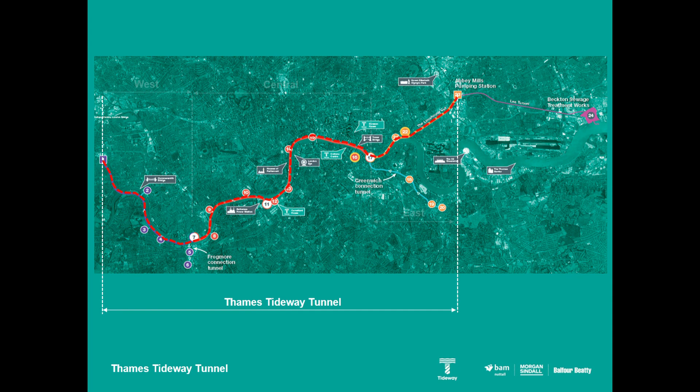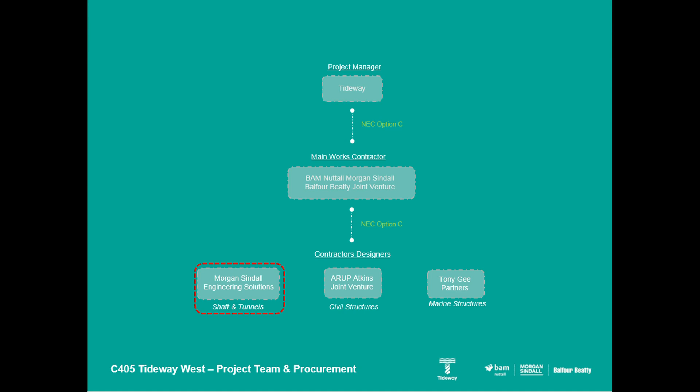Given the scale of the scheme, the tunnel was split up into 3 key contracts, namely West, Central and East. The Western contract, contract C405, was awarded to the BAM Nuttall, Morgan Sindall and Balfour Beatty joint venture in September 2015. It was procured using an NEC Option C single-phase design and construct contract. The joint venture has 3 key designers undertaking their design, now shown on the slide. A point of note is that Morgan Sindall Engineering Solutions are responsible for the shaft and tunnel temporary and permanent work design.

The scope of C405 West comprises 7 key shafts, most of which have been designed and constructed using SCL linings. 5 of those 7 structures are now complete, and over 15,000 cubes of SCL have been applied in that process.

Our main drive is a 6.9 kilometre long single bore of 7.1 metres internal diameter. Our drive starts in Carnwath Road and goes west towards Acton storm tanks. Our main tunnel TBM, Rachel, is about 450 rings in. She's got a long way to go, but she's making good progress. She's constructing our tunnel with a look-up of 1.4 millimetres per metre. So far, she has churned up and spat out over 70,000 tonnes of London clay from beneath the river.

The scope of West also involves 4 smaller connection tunnels, and these have been constructed using a range of methods, including mechanised tunnelling, pipe jack and SCL. The focus of our presentation will be on the Hammersmith Pumping Station, and you can see that on the slide now.

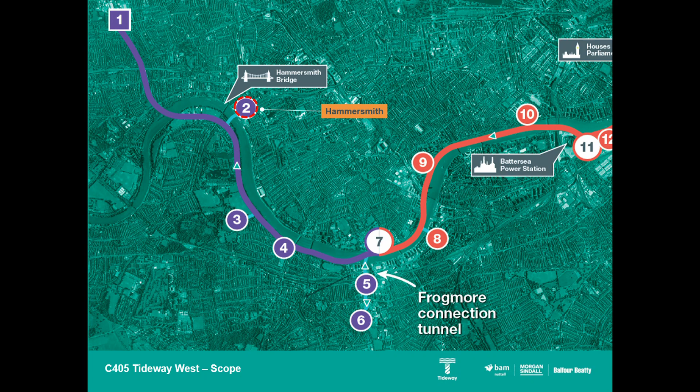They're working in close proximity to raw sewage mixed with discarded wet wipes and sanitary products. The works must be undertaken while keeping the pumping station live, as if it goes offline, this may result in the catastrophic flooding of West London.

The inlet channel is just one key element of this asset of national importance. It channels storm relief flows into the pumping station, where 8 stormwater pumps pick them up and pump them out into the Thames.

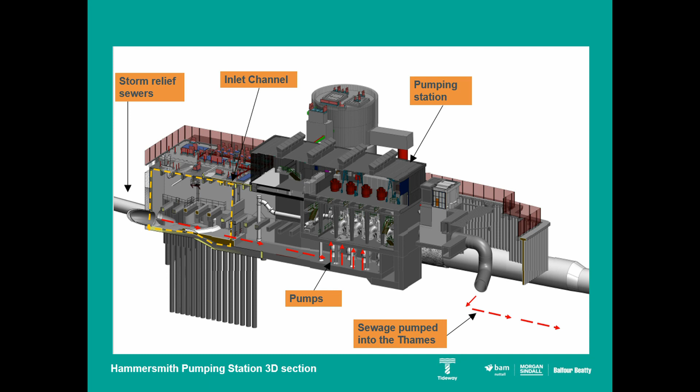The works in the channel are planned in such a way that the men and their tools can be removed quickly in the event of a storm. The channel is 18 metres deep, 5 metres wide, and 25 metres long.

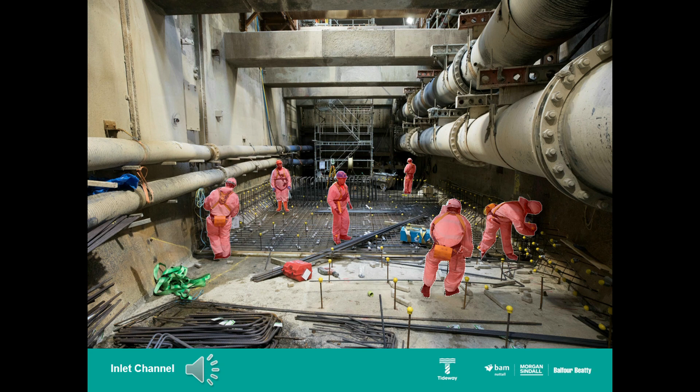When storm relief flows make their way to Hammersmith, they enter the inlet channel at a flow rate of up to 30 cubic metres per second.

To put that into context, this great theatre is 18 metres deep, 12 metres wide, and 8 metres high. It therefore has a volume of 1,700 cubic metres. I'd like you to imagine that the storm flows are entering this room and not the Hammersmith Pumping Station.

On entry to the room, it would take just 9 seconds for you all to be swimming in sewage. 55 seconds later, the room would be full and we'd be in serious trouble.

The Hammersmith site was signed over to the BMB joint venture in the summer of 2016, and works have been going on since. The site is surrounded by a number of key residential receptors and sensitive assets, such as Frank Banfield Park to the north, and the residents of Chancellor's Road and Fulham Reach to the southwest and east.

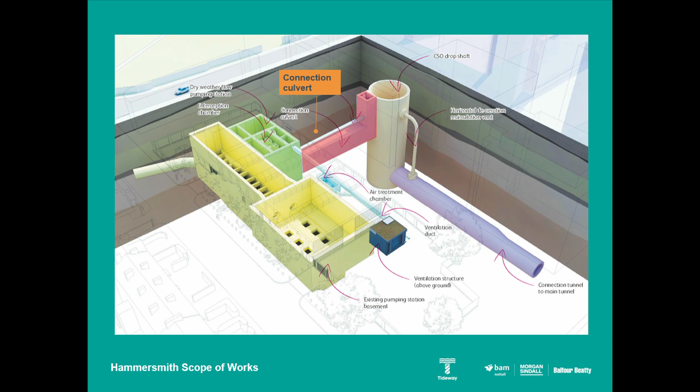The works at Hammersmith are very typical to other CSOs on the scheme. Their purpose is to transfer the flows from the pumping station into the main tunnel, and that is achieved through an interception chamber, a connection culvert, a drop shaft, and a connection tunnel.

The interception chamber is being constructed directly adjacent to the inlet channel, and the works here are progressing well. The team have now excavated over 4,000 tonnes of material and have just started the internal structures. Once complete, the interception chamber will house a series of penstock gates, which will control flows into the new Tideway scheme.

The connection tunnel is 300 metres long and juts out into the centre of the Thames where it meets the main tunnel. The tunnel passes under a number of key assets, including the river wall and 2 blocks of luxury flats with an average value of 1.4 million.

I'll now pass you over to Peter, who will take you through the design of the works.

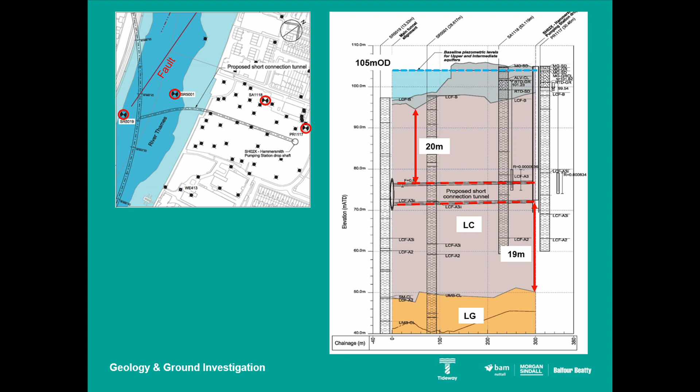Here is the overview of the client reference design. This shows the key requirements for the design development. We have a 35-metre deep shaft with 11 metres internal diameter, a 48-metre long deaeration chamber with a 5.1 metre internal diameter, and a 250-metre long connection tunnel with a 4 metre internal diameter.

Both the tunnel and the shaft required the use of a primary and a secondary lining, and the use of a waterproof membrane as well, so it could comply with the strict water ingress requirements. There is a BMB innovation to remove this waterproofing, which required consent from Thames Tideway as well.

There's a 3.5 metre internal diameter stainless steel tube in the middle of the shaft. The purpose of this is to transport the sewage down from the top of the shaft to the bottom in a harmless manner. Otherwise, if the sewage came down on itself, it would come crashing down to the floor and damage the structure.

The way this works is by creating a vortex within this tube. The sewage comes towards the top of the tube and spins down the shaft all the way down to the bottom in a harmless manner.

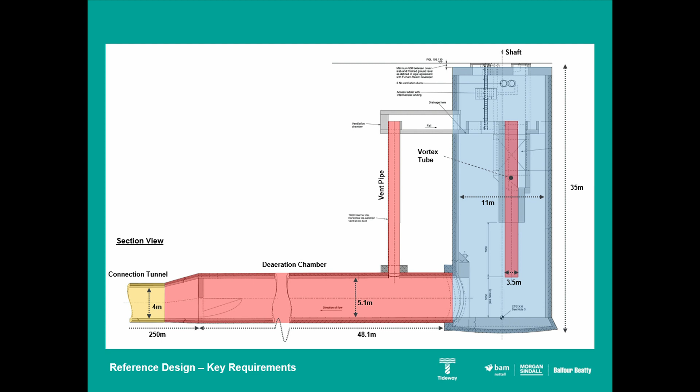We've undertaken a number of computational fluid dynamic models, and real-life scale tests were undertaken just to verify this assumption. This short video shows how the sewage will travel along the connection culvert and down the shaft as a vortex.

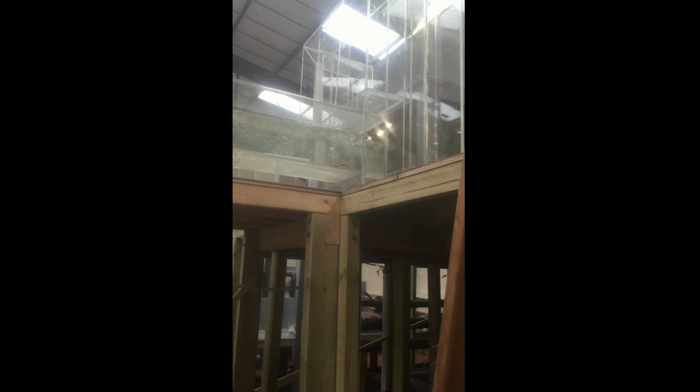The next video that I'm about to show will show another scaled-down model, about 1/10 of the size of the actual shaft. Just to note, as the water comes out of the bottom of the vortex, you'll see the amount of air that is generated in this. This is as we go along the connection culvert, down the vortex.

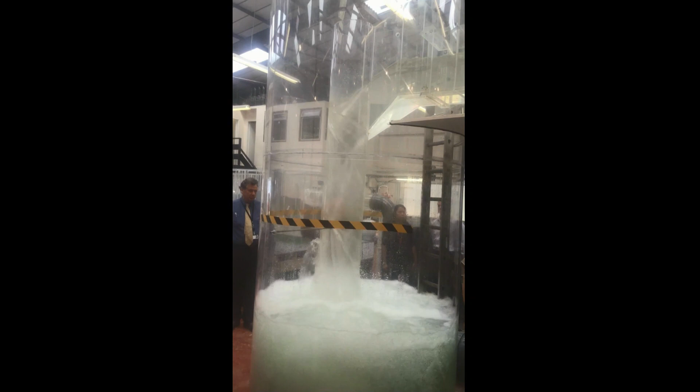So as you'll note from that video, there's a lot of air that's generated at the bottom after the vortex. It's really important that any of this trapped air is removed from the system so it doesn't cause damage in the future. So this is where the deaeration chamber and the vent pipe come into play.

As the sewage moves from the shaft into the deaeration chamber, there's a flow restrictor wall at the end of the chamber, which basically holds up the sewage just long enough to allow the air to rise to the surface and leave the sewage. It then travels along the top of the deaeration chamber, out the vent pipe, and back up to the surface in a harmless manner.

For the design, the works information sets several key requirements: a 120 year design life, to be able to accommodate the predicted sewage flows and the surge pressures that would be experienced by both the shaft and the tunnel.

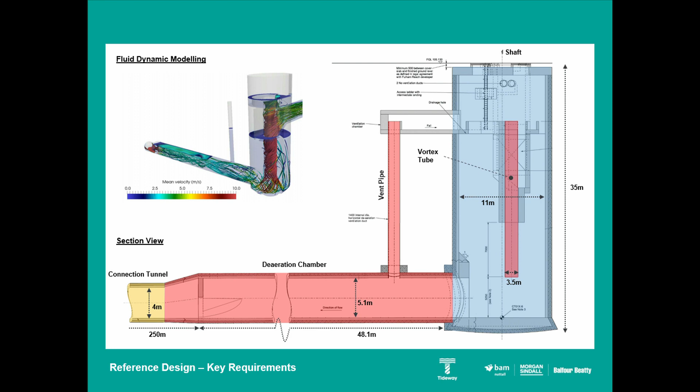To comply with the strict water ingress and sewage egress requirements, to minimise the requirement for repair, replacement and maintenance of the works, and finally, the design and construction must stay within the boundaries stipulated by the development consent order. In terms of Hammersmith, this is very tight, which Ed will touch upon later.

As already mentioned, the water ingress requirements are very strict. As you can see here, the maximum acceptable water ingress into the completed shafts and tunnels is 0.1 litres per metre squared per day on average, or 0.2 litres per metre squared per day over any 10-metre section.

Part 2 of this clause also states that it's limited to damp patches, which is defined as discoloration of part of the surface of the lining. This part can be open to interpretation and has caused issues as well - well, not issues, it's caused points of contention along the way.

Part E also states that limitations on seepage apply to both ingress and egress, so we have to ensure that the water doesn't come in and the sewage doesn't escape. This is verified by observation and measurement within the tunnel, and for outside of the tunnel, it's verified by calculation and monitoring the groundwater quality in the local area.

These strict requirements have been outlined by Tideway to ensure that the maintenance and operations costs of the system are minimised across the whole of the Thames Tideway scheme.

I will now give you an overview of the design development gated process, which is very similar to the RIBA stages. As a design and build contract, the contractor has been heavily involved throughout all of the stages, from gates 1 to 5, and they've helped develop the design through the use of several constructability meetings.

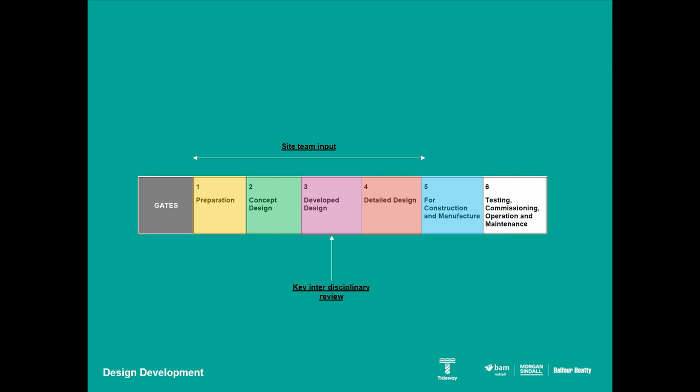The Hammersmith design started in September 2015, along with the start of the contract. The primary lining for just the shaft finished in December 2017, and for the tunnel, the primary lining and the secondary lining finished in April 2018, so not very long ago. The shaft secondary lining is close to being finished, and the internal structures, the vortex and the cover slab are still ongoing.

Here's an overview of the Gate 5 design. Each of the elements specified here are to comply with the durability requirements in terms of the mix design and the design crack widths. This is in order to make sure that it meets these tight water ingress requirements.

The shaft primary lining was created with steel fibre reinforced SCL with 1.2 metre advances as it progressed. The shaft primary lining and the SCL allowed flexibility, so therefore in order to minimise the thicknesses and also the amount of material consumed. And as we progress down to the bottom of the shaft, it also has an elliptical shape which incorporates the tunnel opening portal.

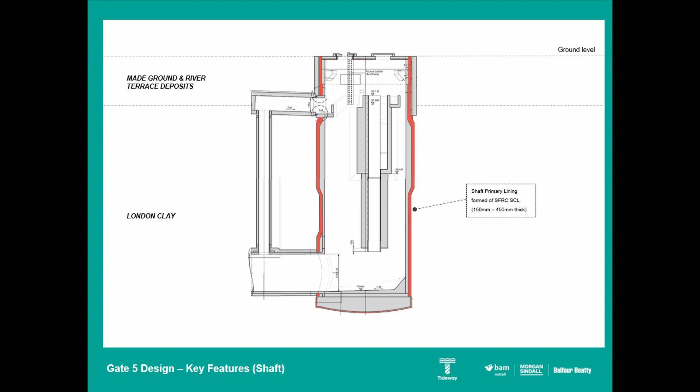There's a thickening section here which uses traditional bar reinforcement, which is also to be sprayed in. At the bottom of the shaft is the base slab. This is a 2.2 metre thick base slab, designed as a flat-topped structural dome, and this resists the long-term pressures of uplift from the geostatic and water pressures.

The shaft secondary lining has hybrid reinforcement, utilising high-performance steel fibres and traditional bar reinforcement. It's up to 800 millimetres thick in places. The traditional bar reinforcement helps to tie in the accommodating structures inside of the shaft, so this ties in any of the internal structures and the vortex tube itself.

The tunnel primary lining is also installed in a similar manner to the shaft. It's steel fibre reinforced and is installed in 1 metre sections and is 325 millimetres thick.

The tunnel's secondary lining is 250 millimetres thick, and the design follows the smart shell technique, which removes the requirement for traditional bar reinforcement and uses high-performance steel fibres, in this case Dramix 5D fibres, to replace that reinforcement. This technique was proven beforehand on the Lee Tunnel project by full-scale tests and has been verified since.

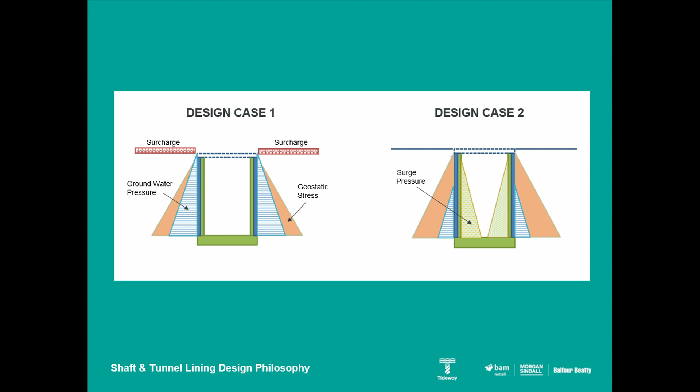To be able to understand how the primary and secondary linings work, we need to understand how they're installed. The primary lining is first installed sequentially, as mentioned, in 1.2 metre advances or 1 metre advances in the tunnel, and this takes all the initial groundwater loading and all the ground pressure as well. The secondary lining is then installed in a stress-free environment.

However, over time, additional external pressures are experienced by the shaft and the tunnel. This results from clay consolidation, changes in groundwater, seepage, and surge events. It causes the primary lining to deform, which then activates the secondary lining, resulting in the two linings working together in a combined manner.

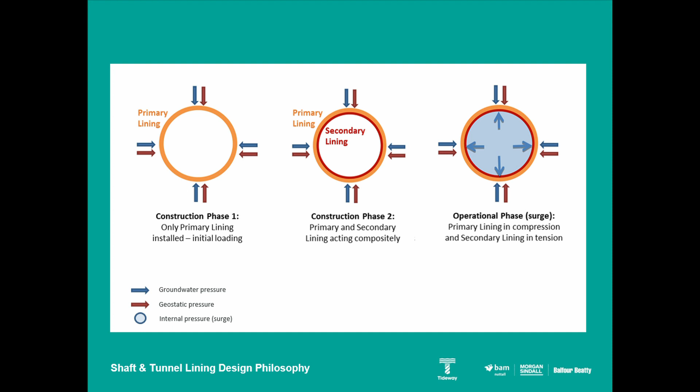When in operation, the primary lining will always remain in compression, and the secondary lining will go into tension during the surge event.

The primary lining, also steel fibre reinforced, will be the same mix as the initial layer, and its sole purpose is as a watertight measure. It uses steel fibres to control cracking in the temporary condition, during installation when bending is expected. It provides the only water tightness that we have, as there's no traditional membrane between the primary and secondary linings.

The secondary lining itself is cast up against the primary lining. As mentioned before, it's reinforced with Dramix 5D fibres, and some areas have rebar as well, to control the crack widths and limit them to less than 0.2 millimeters. This ensures the durability and promotes self-healing of the concrete.

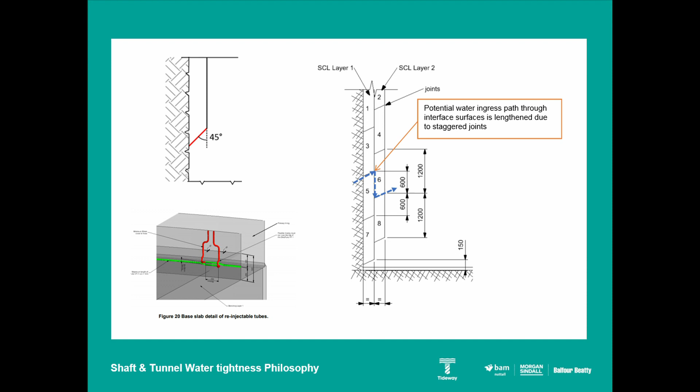Here you can see the key requirements that, as the designer at MSCS, we've outlined for the watertight SCL mix. The steel fibers require a minimum tensile strength of 1500 MPa. The mass spray concrete requires a low permeability coefficient of 1 times 10 to the minus 12.

To put that into context, normal spray concrete has a permeability coefficient of around 1 times 10 to the minus 10, and up to around 1 times 10 to the minus 12. So we need to make sure that we're better than this.

And not just across the mass spray concrete, but also at the joints within the spray concrete. The key addition here is the crystallization agent, and in this case, we've used Xypex with a recommended dose of 5 kilograms per meter cubed.

The way this crystallization agent works is that it's infused with the mix itself, so it actually becomes part of the mix, and it reacts with any moisture that travels through the concrete. By reacting with the moisture and the byproducts of cement hydration, it's able to form insoluble crystals within the capillaries of the concrete, which helps provide further assurance of a watertight concrete.

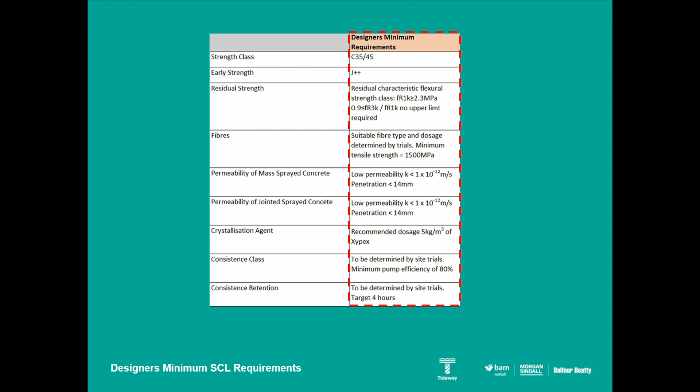Through working with CPI and BASF, it was identified that the Xypex was interfering with the superplasticizer, delaying the strength gain of the concrete. Once this was realized, the superplasticizer was changed, and the accelerator was changed from SA160 to SA194.

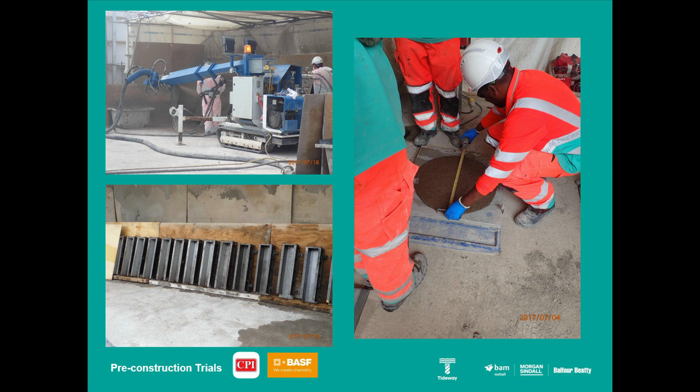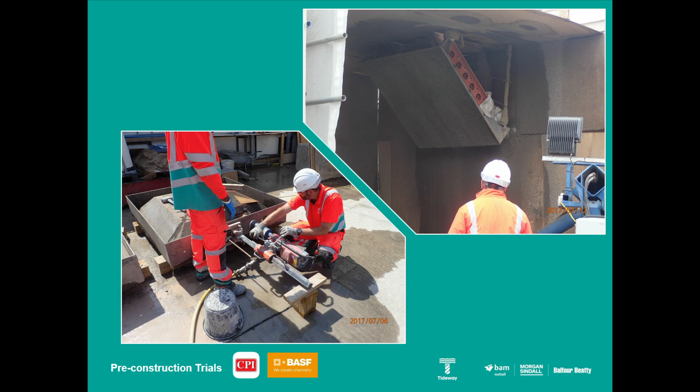The concrete proved easy to spray with low levels of rebound and good compaction. This was regardless of location, such as the invert or the shoulders, the mix proved to be very good. And as you can see from our cores and our flexural beams as well, we managed to obtain a very good mix.

There is a particular focus on the joints. So here on the left-hand side, we've set up a panel. The way we'd go about this is we'd spray the first-hand side, and we'd try and form the joint during the spraying process.

After spraying, we'd come along, clean and tidy up the joint with a high-pressure jet wash, similar to what we'd actually do in the works. We'd leave the sample for 24 hours, after which we'd return and spray the rest of the panel. Once the panel was complete and cured for 28 days, we'd come back and core directly through the middle of the joint, so we were able to test this joint for compressive strength and, more importantly, permeability.

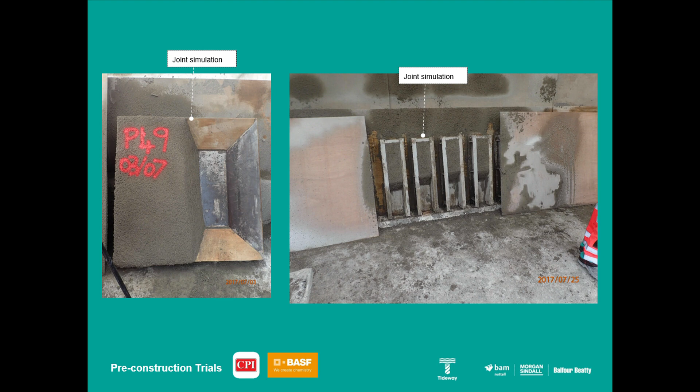Two water penetration tests were undertaken on the mix. The first one was a European standard test, which is specified in the works information. This tested the sample for 72 hours under 5 bar.

The second test was a Morgan Sindall developed test. It's a far more onerous test, as it's tested for 96 hours under 10 bar of water pressure. And it doesn't just measure the water penetration, but it also measures the amount of water left within the sample. From this, we're able to ascertain the water permeability coefficient.

As you can see on the screen, this is a general setup of testing equipment. And what we're trying to achieve on the right-hand side is just very low penetration.

After 6 weeks of trials, BMB developed their final mix. They selected Dramix 4D fibers to be able to meet the minimum tensile strength.

The permeability coefficient was a minimum of 7 times 10 to the minus 14 across both the mass spray concrete and the jointed samples, which is much lower than our requirement. And the addition of Xypex was still included as well.

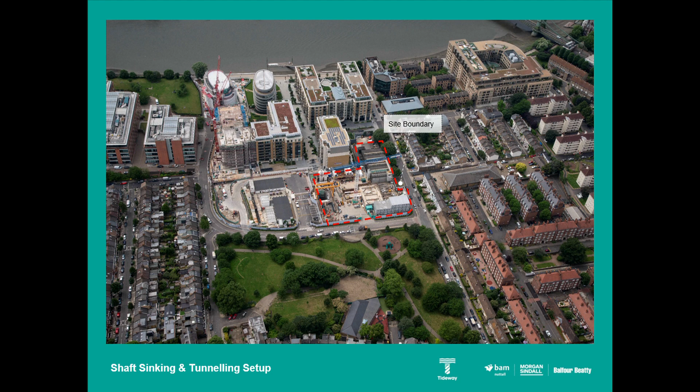Initial ideas pointed towards the use of an acoustic shed, which would be placed over the shaft, craneage and batching plant. But given the tight constraints of the DCO, this was not possible. As you can see from the image, the site boundary we were given was a mere 2 metres away from the extrados of the shaft. So this is the compromise site setup we came to.

I'll start with concrete batching. We initially considered the use of a traditional plant. Given the tight available working space, this was not possible. It was also not seen as wise to have aggregate bins that were loaded day to day because of the noise associated with that. Due to the issues with the mix and the flow retention reduction, ready mix would also not be feasible.

Additionally, the code of construction practice only allowed deliveries between 8 and 6, and we wanted to tunnel on a 24-hour basis. So the selected solution was provided by CPI Euromix, and this was a pre-blended silo system.

This system works by mixing all the dry constituents off-site and kiln drying them, then they're delivered to site in a tanker and blown into the silo. All that's left to do on site is dose the mixture with water, and that's done with a screw at the bottom of each silo. We went for 4 silos with a total capacity of 350 tonnes, and this gave us about a week's supply.

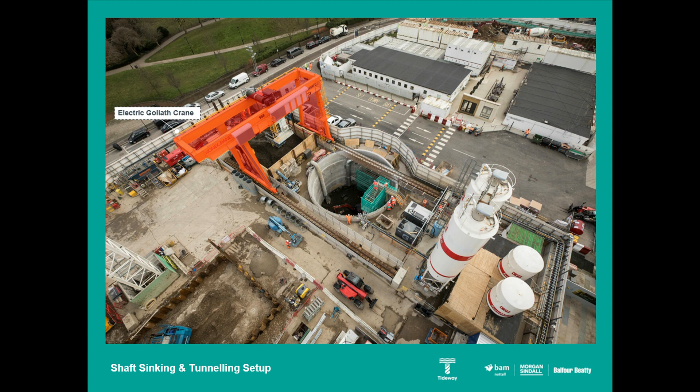The next point of interest is the electric Goliath crane, and this cost an absolute fortune. But as you can imagine, it's quite neat use of the space. The southern beam spans 13 metres over the shaft. This was also a lot quieter than a diesel crawler crane.

The runway for the crane, there was a real focus on the design of that. So any metal to metal or metal to concrete components had rubber pads on them to minimise the vibration. The runway was equipped with a number of flat jacks, to enable the team to take out any settlement as the shaft sinking and tunnelling works progressed.

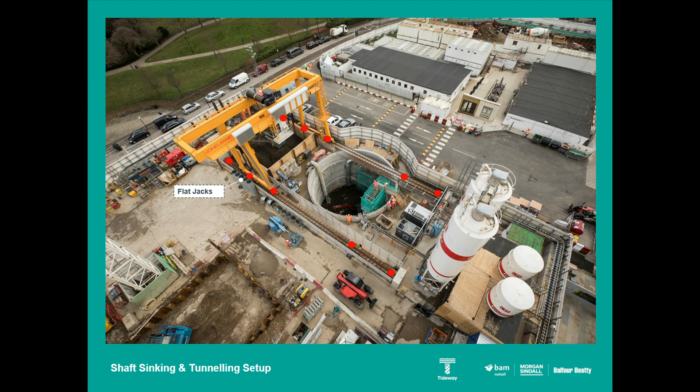The last point worth noting is the muck bin design we went for. Following a number of quite high-profile near misses on Crossrail with precast L blocks, we decided to go for a quite robust, again expensive, king post muck bin alternative. We saw this as best practice and a way of reducing the risk.

As you will have gathered from Peter, the design required a high focus on quality SCL, and this was very much in the back of our mind when planning the works. And we saw these 3 building blocks as key ways of driving that high quality.

We needed to attract a highly skilled and experienced workforce. We needed to drive ownership between the gangs. As you'll all be aware, if there's many gangs, it's always the gang's fault who's not on shift. We also wanted good levels of workforce morale.

We saw the best way to solve all 3 blocks was through the proper selection of a shift pattern, actually thinking about that.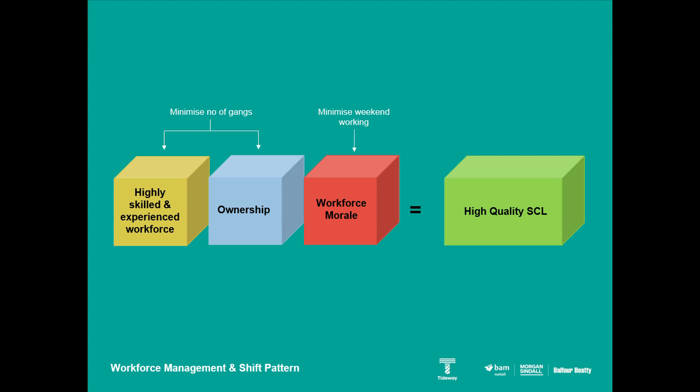So here are the shift patterns we went with. Drop shaft shift pattern, very straightforward. 10-hour shift, Monday to Friday, no weekend working.

The tunnel shift pattern, we went for a 5-2, 4-3 shift pattern with an 11-hour shift. Again, no weekend working. The 11-hour shift didn't comply with one of the key red lines of the works information that had been set out, and that was a 10-hour shift limit on tunnel workers. But through fatigue analysis, we could show that actually this had a lower fatigue score than a lot of the traditional shift patterns, 7-2, 7-2, 7-3, where you work in 8, 9, and 10 hours.

So dispensation was received. However, there was a number of conditions attached. We had to provide regular questionnaires to the workforce to gauge morale and fatigue, and also provide fatigue awareness training for all key members of the workforce.

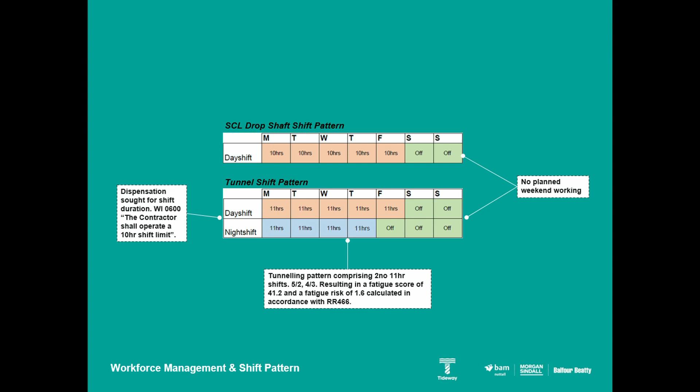Shaft sinking took place early 2018, and we were the first team on Tideway to start SCL. Peter described the shaft earlier. We split it down into 29 advances of 1.2 metres. The lining thickness changes as we go down the shaft, and we could only start the staggered joint detail that Peter talked about from advance 4 onwards.

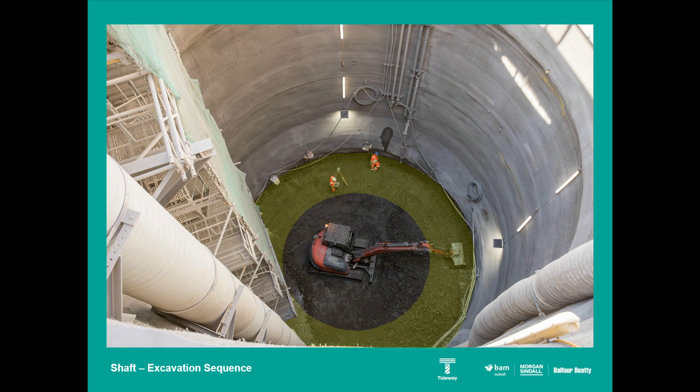Excavation of the shaft, that always followed the same process. Bulk mucking of the centre to advanced formation using an 8-ton excavator, and then trimming the berm, a 1.8 metre deep berm, back to profile.

The next step, this was the key step in the whole construction process, joint preparation. So there's 2 stages to this. Stage 1, inspect the joint and identify any poor SCL or overspray. Then if there was any poor SCL or overspray, remove this with an excavator-mounted rock wheel. The second stage, we then jet washed the whole joint using a high-pressure jet washer. Quite a lethal thing, and this was robot-mounted.

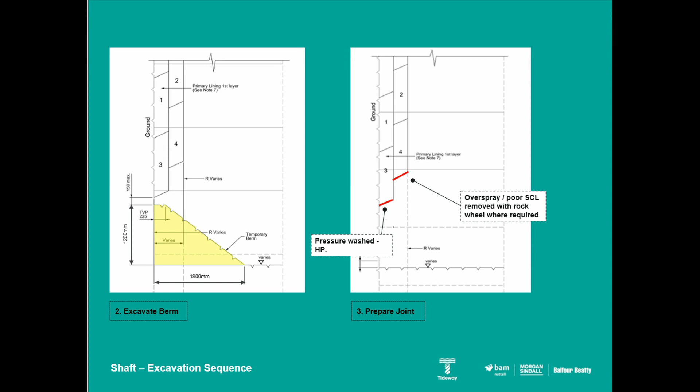So here's what a good joint looked like. On the left, you can see the 600mm stagger between the SCL layers. And on the right, 45-degree joint with fibres exposed, free of poor material. A point worth noting is one of the key hold points in our ITP was the inspection of these joints. And every joint required sign-off by an engineer with a minimum of 5 years SCL experience.

Application of the SCL, dead straightforward, 2 layers. We did this continuously if possible to provide a good bond between the layers. And then finally, the leading edge was green cut before starting the next excavation.

Throughout all our SCL works, best practice from Crossrail was adopted. This included air-fed RPE and Bluetooth communication for any operative in any SCL restricted area.

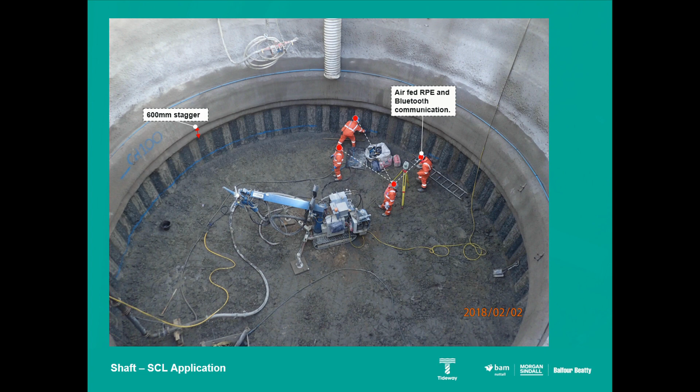In terms of testing, we went above and beyond the minimum works information requirements. We needed good quality SCL day in, day out, and that was absolutely critical for the design. To do that, we set out a daily workmanship panel, and this was done at a frequency of 1 panel per nozzleman per day. So if 2 nozzlemen sprayed a shaft advance, we'd spray 2 panels.

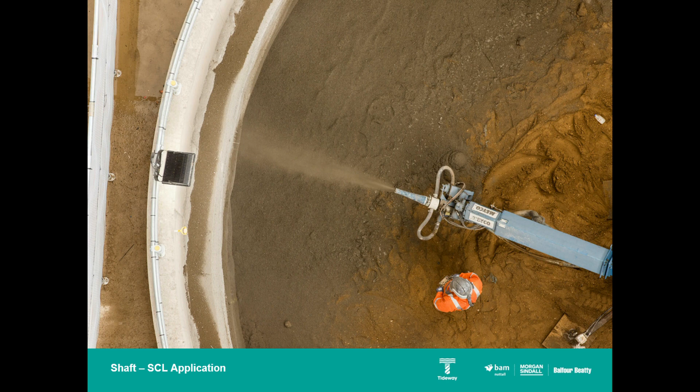These panels would be cored, inspected for workmanship, compaction, voidage, and compressive strength. It might seem over the top, but it meant we could identify any issues with the workers or the equipment within 24 to 48 hours. It's really critical.

So there's a picture of the completed shaft. In total, it took 15 weeks to complete. We had an average advance rate of 2.4 advances per week. Over 1,000 metres cubed of SCL was sprayed in the process. In terms of settlement, we achieved 19.1mm, and our prediction was 19mm, so bang on target with that.

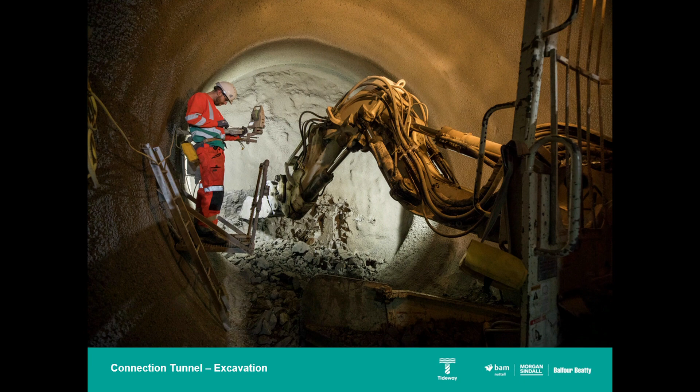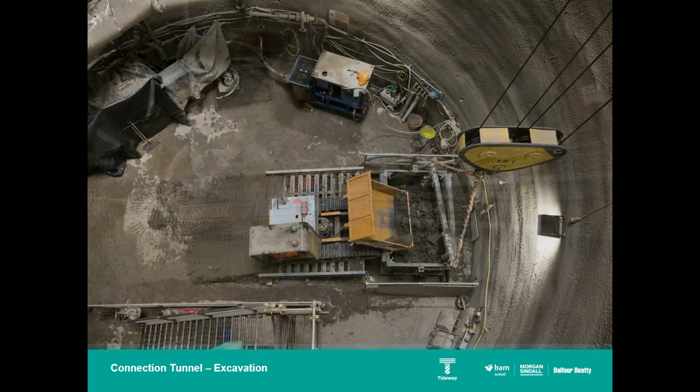Moving on to the tunnel. The tunnel was split up into 1 metre advances, 295 in total. The face was excavated using an ITC 120 heading excavator, and the 15 tonnes of spoil from each round was transported to pit bottom using a series of track dumpers. Once at pit bottom, it was lifted to the surface using the Goliath crane.

Like with all our tunnel headings on Tideway West, the laser shell method was adopted. That makes use of a remote profiling system called the tunnel beamer and also an inclined face. Our face was inclined to 20 degrees to the vertical. This significantly reduces the risk of injury associated with SCL fallout. This is adopted throughout Tideway West, and I'm proud to say to this day, we have not asked one engineer or operative to work below freshly sprayed concrete. I think that's a really strong point.

In-tunnel ground investigation was undertaken using probe drilling at 12-metre intervals with probe 16 metres ahead. What we found was consistent with the site investigation. On this image, you can see a clear interface between London Clay Units B and A3II, denoted with a band of claystone in the face.

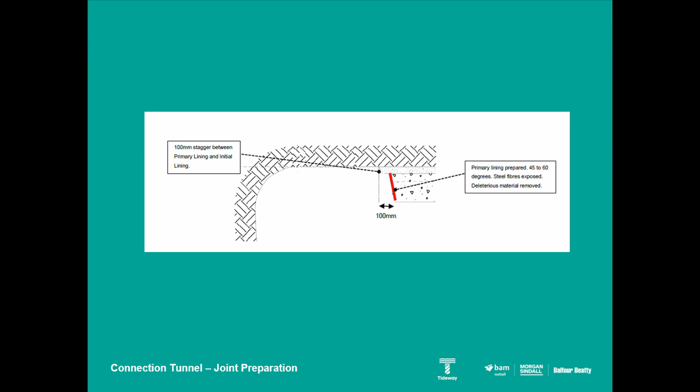The tunnel detail was slightly different to the shaft, given the constraints of its diameter and the lining thickness. We weren't able to adopt a larger stagger, but we still had a stagger: a 100mm initial layer, then a minimum of 100mm stagger between that and the primary layer. Like the shaft, we were looking for the same joint quality: 45-degree joint, fibres exposed, poor material removed.

The preparation of this joint took place in a similar manner. Any poor material was rock wheeled off and then high-pressure jet washed. This was a bit more challenging than the shaft though, as we found the rock wheel often damaged that leading edge, the initial layer, and it'd be broken away.

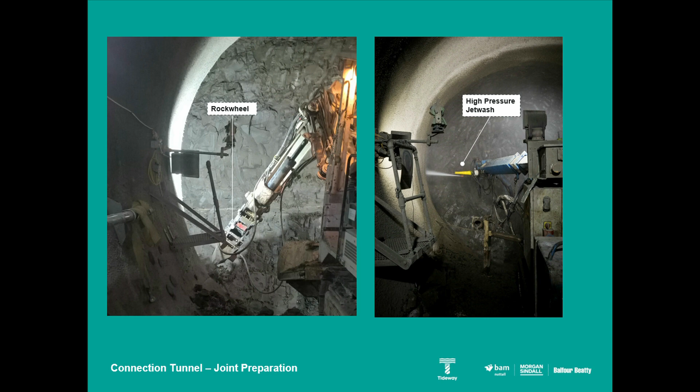Shotcrete for the tunnel was batched on the site surface and pumped 350 metres to the face. We started by applying the initial layer from the invert and working to the crown, blowing that out, and then applying the primary layer again, invert to crown, all in one operation.

There was a real focus on management of the dust during the invert section. This is an example of a man on a blowpipe, blowing away rebound from that critical trailing edge. However, this is a challenge, as you're very much reliant on the skill of that man to ensure there's no contamination of that joint.

Challenges of joint preparation aside, the tunnel advanced at a good rate. It took us 22 weeks to complete, and we achieved an average production rate of 14.1 metres per week. This rate actually meets the requirement we set out in the tender, with a 7-day week working shift pattern. So we'd reduced the number of gangs and hours, and we still met the target.

In terms of settlement on the tunnel, again, we were broadly in line with the predictions. We had a maximum settlement of 10 millimetres along the centre line.

Okay, so the interesting bit. Post-construction of the SCL linings, we undertook an ingress check. We looked at both of the clauses: 0.1 litres per metre squared a day, and the second clause, is there any damp patches with visible movement of water?

So I'll start with the shaft. The surface area of the shaft was just over 1,000 square metres. The allowable ingress per 24 hours was 106 litres, so that's what the works information would allow. Our actual ingress in 24 hours was 0. For the second point, number of visible joints with damp patches with visible movement of water, also 0. So following the completion of the shaft primary lining, completely compliant.

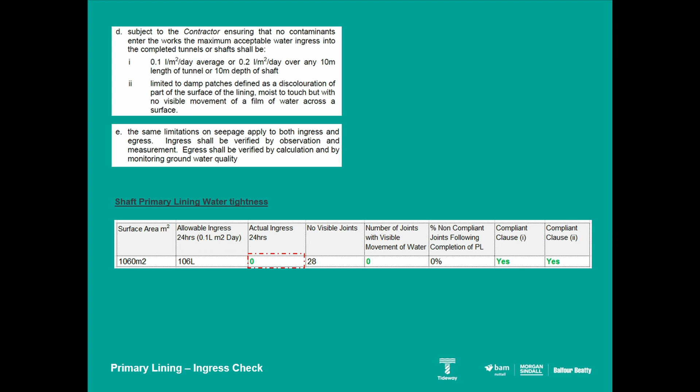Okay, so moving on to the tunnel. Works information allowed 434 litres of ingress per 24 hours. We did our measurements, and we had 9 litres in the whole 300 metres of the tunnel.

However, we came a bit unstuck on the second clause. We did have a number of damp spots, 79 damp spots on the leading edge of the advances. We're not talking about running water, we're talking about damp spots with a visible sheen. We found the second clause very hard to interpret, especially with the client. The conclusion of that was we injected all those damp spots.

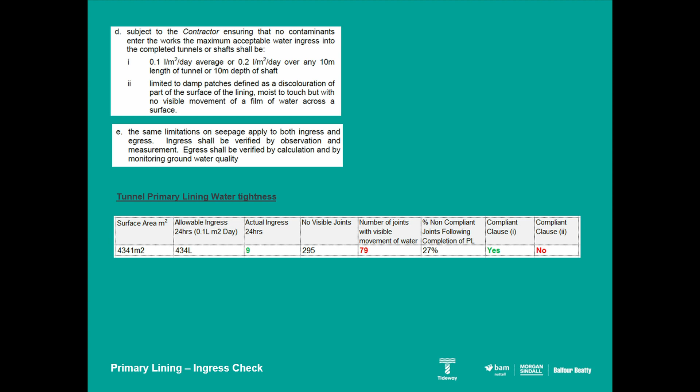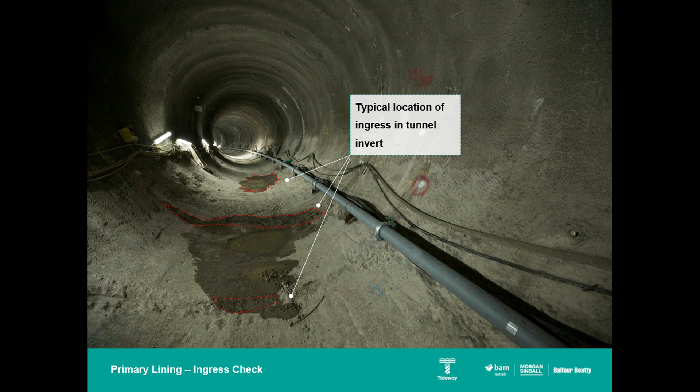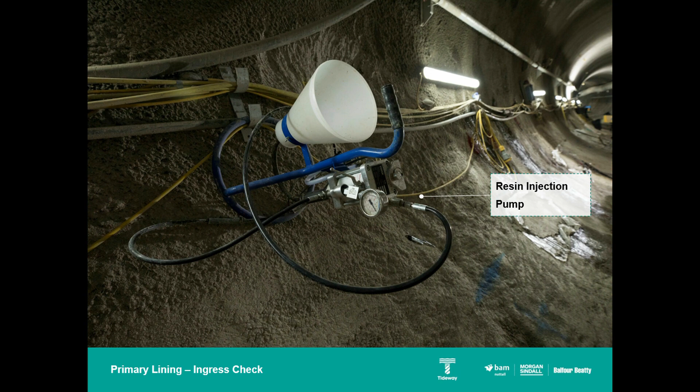Injection of those damp spots was undertaken in accordance with BS EN 1504, and we used a Type S swelling resin. And there you have it after the injection. We undertook another inspection following the resin injections, and the tunnel was signed off as watertight.

Okay, so moving on to the secondary lining construction. This is one of the many elements of works at Hammersmith that was a project first, and this was seen as very much being a test bed for Tideway West and the whole of Tideway. The design required a full round shutter, and we went to Kern Tunneltechnik in Slovenia to deliver a bespoke shutter just for these works.

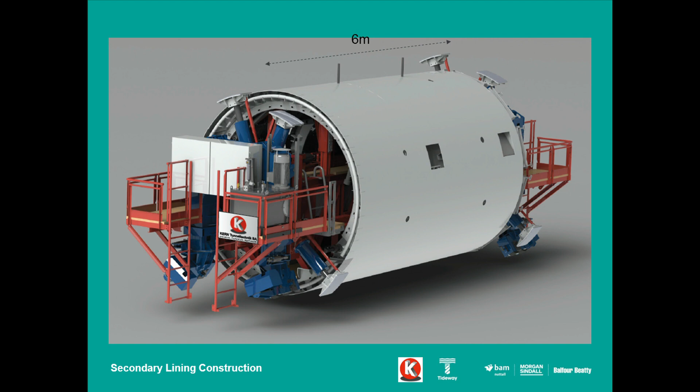This shutter takes on board a lot of key learning from Lee Tunnel. As Peter said, the first one was the shutter length. At Lee, we were trying to pour concrete into a 30-metre long shutter. Here we've got a 6-metre long shutter. The maximum shutter length we will adopt on Tideway West is actually 10 metres, so 1/3 of Lee Tunnel.

The second key learning was to design the shutter for a full hydrostatic head. That means we can fill it as quickly as we like. The length and that feature together mean you can fill the shutter quickly. That significantly reduces the risk of cold joints, voids, or poor flow of concrete.

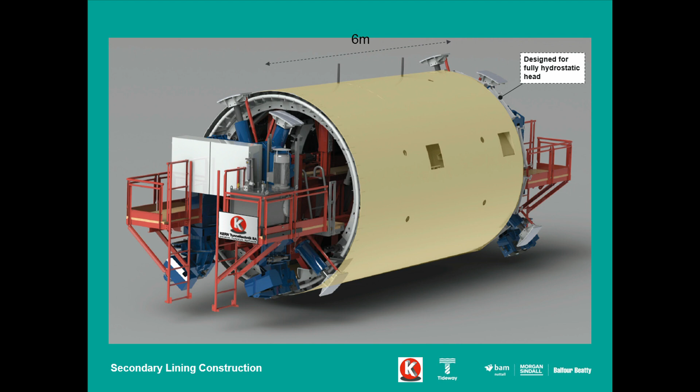The shutter also incorporated a number of key innovations. The first one was PLC automation, and this is the first tunnel shutter to have an integrated PLC. Key components of the shutter were fully controlled by that logic computer. That enabled some key data collection and also some new functionality, so we could operate the shutter in semi-automatic and automatic mode. That gave us an extra safety net because it meant we couldn't damage the machine.

I'll give you an example. When running this in semi-automatic mode, we could not drive the shutter forwards with the spud bars extended. We could not collapse the skin with the legs retracted. The final innovation was the use of automatic spud bars. Again, they might look like normal spud bars, but it takes away any manual movements to lock and set these into position. The key aim of the spud bars was for quick setting and also for data collection.

Prior to undertaking the works, the site team did some pretty comprehensive pre-trials on the mix development. We started off with 3 ready mix suppliers and whittled that down to 1. That mix was then optimised for filling and vibration. We wanted a good finish in the invert, which was one of the key issues at Lee Tunnel.

To do that, we had a bespoke testing station, again provided by Kern, and this made use of some of the forms from the Lee Tunnel shutter. As you can see, the testing station was equipped with a number of key features like the tunnel shutter. It had the same vibrators, it had the same injection ports, it had the same ceramic coating on the forms. The frame of the testing station enabled us to simulate not just the invert, which was done on Lee Tunnel, but also the knee and axis positions.

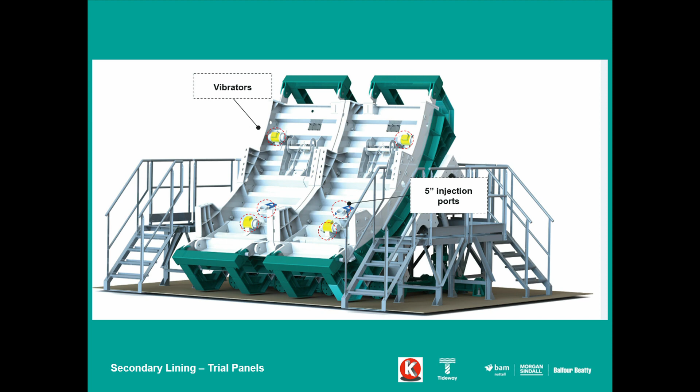10 trial panels were undertaken, and with each panel we tried different consistencies, different filling methods, so submerged filling or top-down filling, and different vibration settings, so frequency, pattern, and duration.

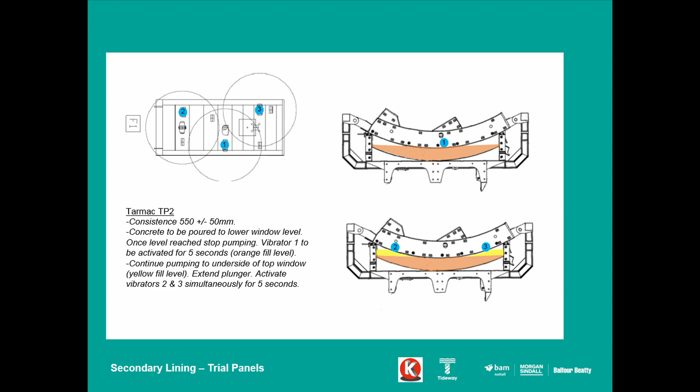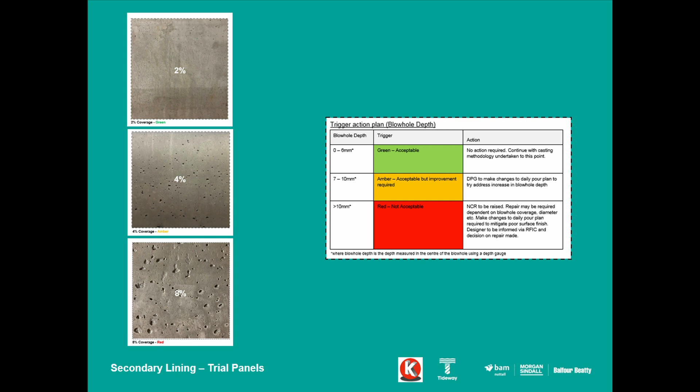The panels enabled us to outline what good looked like, and this resulted in a number of trigger points being set for the works. So we had triggers on blowhole coverage, depth, and diameter.

The delivery of the shutter took place in March this year, and we assembled 90% of it on the site surface. A 500-ton crane came in for the lift, and it was quite a tight one—there was just 250 millimetres clearance between the ventilation structure and the formwork. As the site AP for that lift, I was very relieved after it had dropped past that point.

The shutter was lowered to pit bottom, and then the front and rear portals were attached. We tested all the spud bars and all the automation before driving it 300 metres to the end of the tunnel. So that's the shutter in situ.

The lining works were undertaken with a day shift and back shift pattern. We actually had a split shift where they overlapped, working 7 till 10 p.m. When planning the works, there was a real focus on how we'd communicate between the pit bottom pump man and the lead liner. We did this with radios, but supplemented that with a radio remote, so the miners at the shutter could stop the pump at any point. That was particularly useful when closing the pour, as it eliminated the risk of overfilling.

The spud bars proved to be a success—they were easy to set and quick. The PLC enabled us to program a predetermined preload pressure, so the spud bars would be extended, they'd load the lining to a preload, and then we'd know they were firm in place. Also during pouring, the sensors in the spud bars enabled us to monitor the pressures. This was a useful tool as it enabled us to see if there was any differential filling within the shutter.

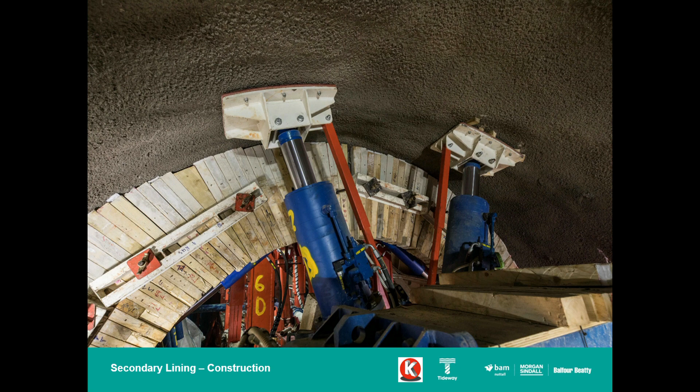The distribution system was done in steel, and we started off by using 10 of the 16 available injection ports. After a few pours, we identified that the concrete was performing well, it was self-levelling, and we reduced this to 4 ports. The final filling sequence was to pump submerge from the invert up to axis level, and then close the pour with the 2 shoulders. The 35 cubic metres of concrete required for each pour took approximately 2 hours to get it behind the shutter.

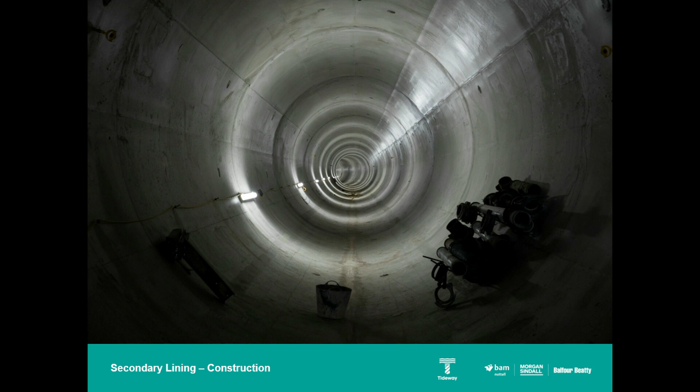So here are a few pictures of the finished job. After a slow learning curve, 2 to 3 weeks of a pour every other day, we were hitting our output and we achieved 1 pour every 24 hours all the way through the tunnel. We didn't miss a single pour.

As you can see, the finish is pretty exceptional, and the invert section exceeded expectations. You'll see from these pictures that the tunnel's completely dry—there's no ingress at all. So in terms of water tightness requirements, we've absolutely nailed it here.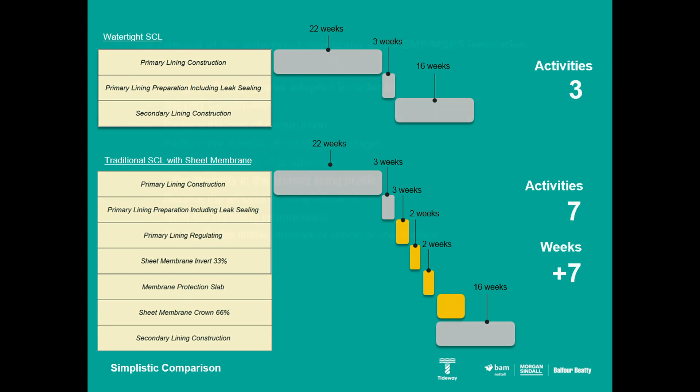The removal of the waterproof membrane was a joint BMB/MSES innovation, implemented in the early stages of design development. This utilised a bespoke sprayed concrete lining mix with Zypex, which offered us a low permeability concrete across both the mass body of the concrete and the joints. This allowed the primary lining to be watertight and to work together with the secondary lining in a combined manner.

The philosophy was adopted in the early stages to help simplify construction, to reduce the cost of construction despite the extra cost of the mix itself, reduce the number of construction stages, save time in terms of programme, offer the flexibility that a primary lining profile can give in terms of the SCL, reduce the amount of materials used—in particular traditional reinforcement—to meet the durability requirements, and to work with the limited amount of space that was on the site itself.

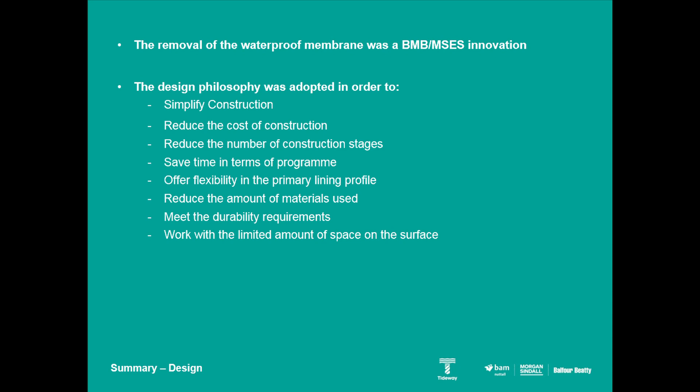The shift pattern adopted by Hammersmith proved to be a big success, working weekdays only. It helped minimise fatigue. It matched the production rates of the tendered 24/7 pattern. It ensured that we had a happy workforce and retained the workforce throughout the whole of the construction of the primary lining and the secondary lining. And overall, it drove good quality as well throughout the works.

The final finish of the tunnel exceeded expectations, and this was achieved by the concrete testing carried out prior to the construction and making minor adjustments along the way. All the key learning and the innovations that we've learned at Hammersmith will be taken forward into the main tunnel on Thames Tideway West.

As you've seen, the primary lining of the shaft was completed with 100% water tightness without any additional works required. Due to the more difficult and naturally dusty environment of the tunnel itself, some leak injection was required to help bring it back within specification. But overall, the watertight SCL, the high quality workmanship that we've achieved, has ultimately led to a dry tunnel at Hammersmith. Thank you.

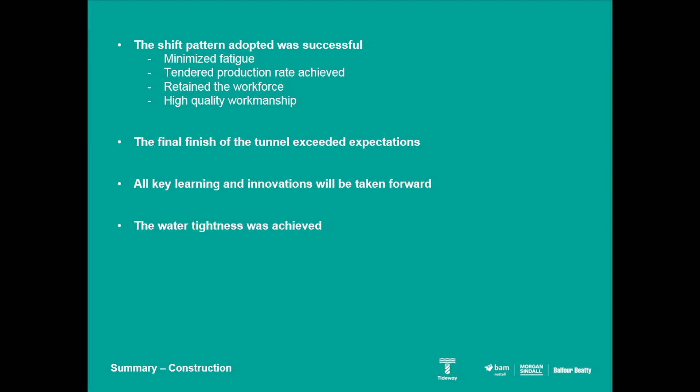What a fantastic job and a fantastic presentation.

Thank you. I know there are a lot of SCL disciples in the room, so I'm expecting a lot of questions tonight. So if there's somebody sat on the floor up there, do you want to come down in the front? Because you'll be sat on the floor for another half an hour, I think. No? Okay. Right. Can we have a first question, please?

Here we go. Benoit. Hello, Benoit Jones, InBye Engineering. Fantastic presentation, thanks guys. It's probably the best prepared and presented presentation I've seen here for a long time. So well done. Just wanted to ask, why did the tunnel and shaft need to be so dry?

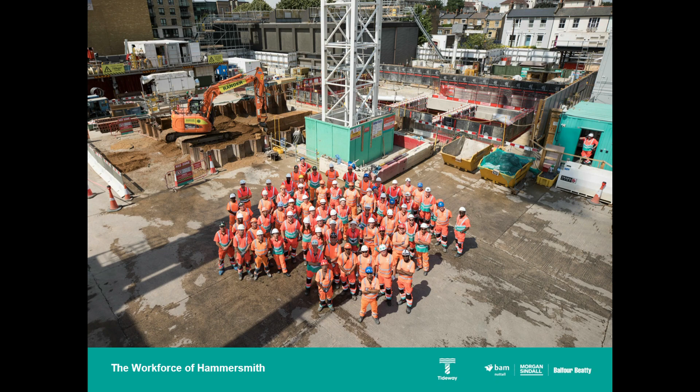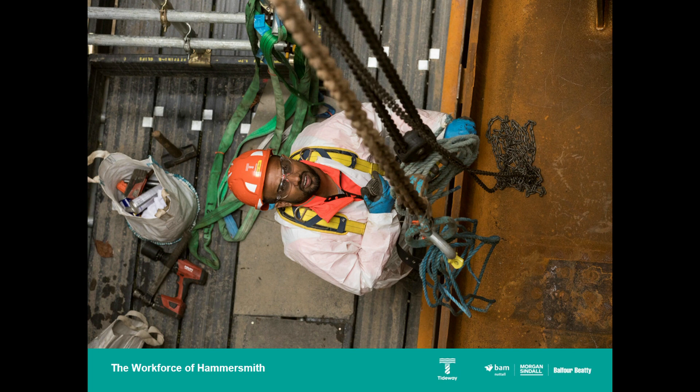Yeah, well, this was set out with Tideway, because if you could imagine, if they'd adopted the BTS specification for a sewer tunnel, they would have been allowed a lot more water in there. But if you imagine all the tunnels on Tideway and all that ingress times 120 years, that's a lot of extra pumping that you need to do at Abbey Mills Pumping Station. So it's purely driven by cost. It's nothing to do with watertightness. Yeah, just to reduce the cost of maintenance of the whole scheme itself.

Front here. Can you wait for the... Alex Lee, BMI Tunneling. So the Zypex SCL mix, did you test that against water pressure as well?

Yeah, we did water penetration testing, which I touched upon earlier. So we undertook initial trials way before we wanted to do within the works. We demonstrated this as an initial case study first. And as I mentioned, we used two different water penetration tests to demonstrate the effectiveness of this. And then we further reinforced this by more testing that B&B undertook later on as well.

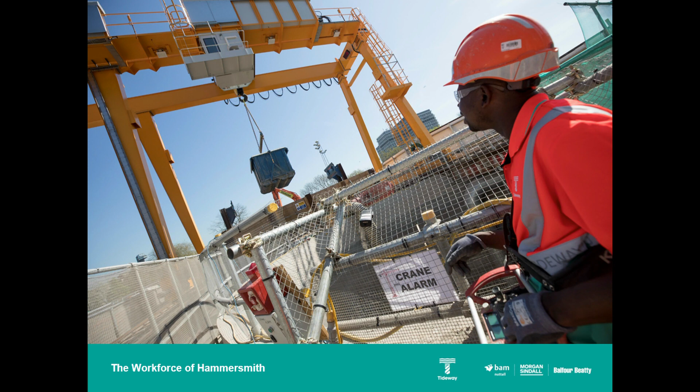But that was just a submersion test or something like that. So you didn't have a... Well, the way the test works is the sample itself is basically sealed on all sides, and then we drive a water pressure up uniformly across the bottom of the sample through both mass body concrete and jointed concrete, and then we keep this pressure there for 96 hours.

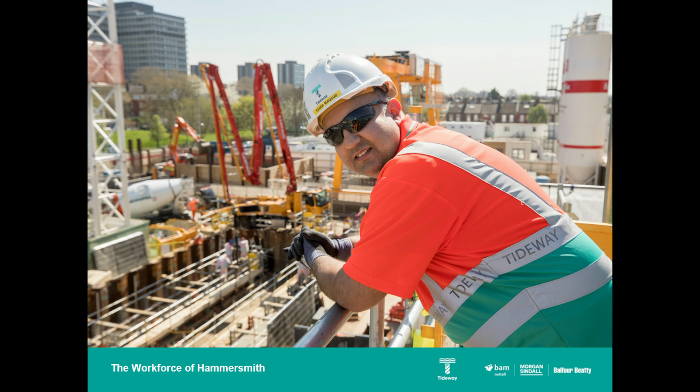And what water pressure did you get to for the water? Well, it was consistent at 10 bar water pressure throughout. And then, as I mentioned before, from this we were able to determine the permeability coefficient because we could measure the depth of penetration and the amount of water retained in the samples.

In the middle here. Good. Just next to Willie. Yep, here we go. Hi, John from Bailey Consulting, and it's not just a comment.

As a designer, I just have some comments on your innovations. Because your lining philosophy also uses concrete-to-concrete direct contact to get rid of the waterproof membrane, due to your full restraint of the concrete contact, you will have very high early age thermal strain, and also due to long-term consolidation, your tunnel will deform. So basically, at your crown, secondary lining crown, you will generate pure tension, and that will lead to through cracks. These things we have seen in Crossrail on a few occasions, and some London Underground upgrades, and probably have seen that as well. So for me, your secondary lining, once it crunks or cracks, you become dead weight concrete and it does not perform any functionality.

The more problem is that because you're in London clay, as time develops your lining deformation will be bigger and bigger. You'll even feel cracks in the crown. And once it starts operation, the crack will still regenerate, and then you allow the corrosive water to reach the interface of the primary lining. For me, it's kind of a mistake in the design. So I hope these kinds of things could be avoided next time. Thanks.

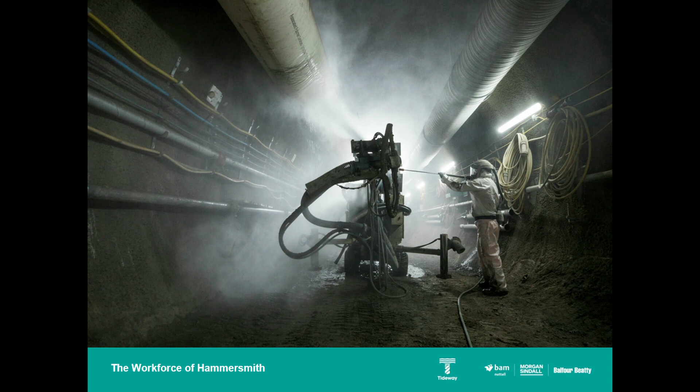The primary lining itself is designed to be watertight over the whole duration of 120 years, and it's only expected to deform in tension during its installation. So over its lifetime, once installed, all you're going to be getting is compression onto the primary lining. So you shouldn't get any more water ingress than what you already have at the moment. The secondary lining is designed for tension, particularly in terms of a surge event.

Another question? Yeah, Charles Allen at the front here. Charles at the front.

Well, first of all, congratulations for creating a dry tunnel in London clay. That's not my question.

My question is, you showed a video of the modelling for the hydraulics, and you showed the vortex shaft, the vortex drop shaft. There's a tremendous amount of aeration at the bottom of that. That can create a problem called cavitation. What's being done to mitigate against cavitation of the base at the bottom of the shaft?

There's a certain amount you can do. If it's just concrete, it's going to disappear within about two years. There's a certain amount of benching that's been put into place to help with this, and there's a certain amount of judgment that we've put into the design to allow for this as well.

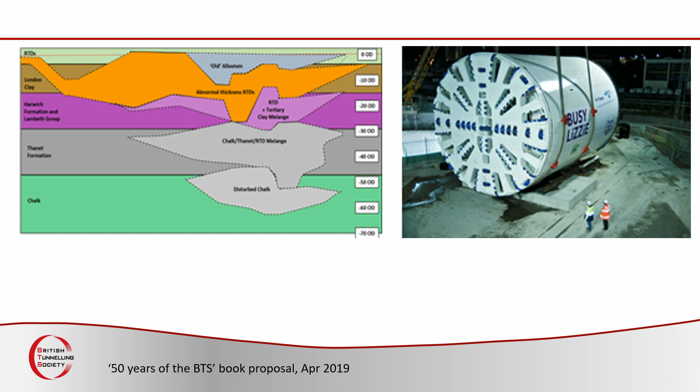On the 14th of November, you'll all remember that this is the anniversary of the Channel Tunnel opening. We've invited Bruno Comp of Bouygues across to give the Harding Memorial Lecture. Bouygues have recently certainly been market leaders in terms of innovation in TBM tunnelling. This is another good reason to come on Thursday, the 14th of November. And I think Bruno's, next please.

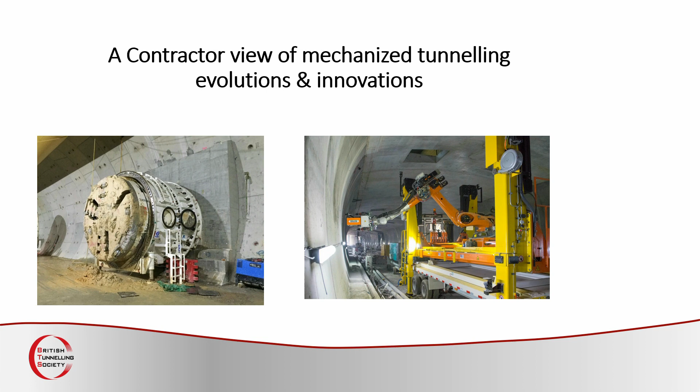Bruno's put in a couple of pictures of the innovation at Tuen Mun using a TBM for cross-passage construction.

Firstly, I would like to thank Mike McConnell for his sterling attempts at bringing the Institution of Civil Engineers to heel on refusing to serve us with sausage and chips and pasty and chips. Mike, taking up his shillelagh, certainly gave the responsible director a battering that he will remember for some time. The good news is that the Institution of Civil Engineers are bringing back sausage and chips and pasty and chips, but not tonight. The bad news is that they're putting the price up to £4.73 for either. The good news is that they'll be providing, well, maybe not, they'll be providing baked beans as well as the sausage and chips.